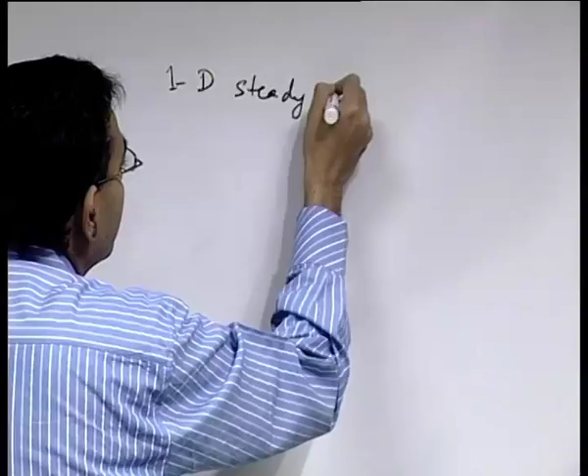In our previous lecture we were discussing finite volume discretization and we illustrated it through the example of a one dimensional steady state heat conduction equation with some heat source.

Now, in the preliminary derivation that we had made, we made certain assumptions. One is that the thermal conductivity is constant, another is that S is constant. There can be interesting non-linearities in the problem if the thermal conductivity and S are both functions of temperature, and then this equation becomes a non-linear equation whose solution may be based on an iterative strategy.

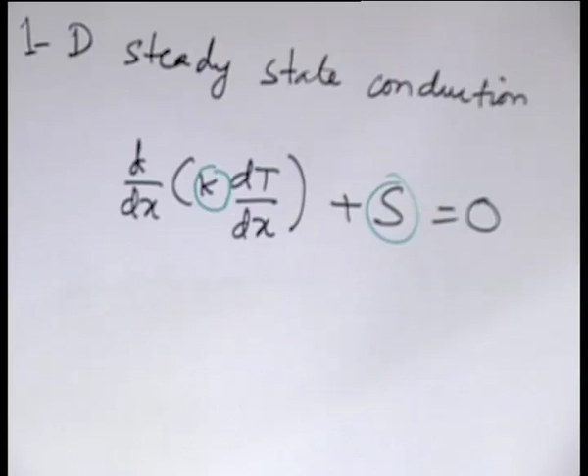So for example, one can start with an initial guess temperature and calculate all the coefficients. We will see how the coefficients may be changed or altered if, for example, S is temperature dependent. These coefficients may be calculated at the particular guess value of the temperature. Based on that, new temperatures can be solved, and this iteration may be continued till the difference between the new and old temperature at each grid point becomes very small. That is the standard iterative procedure one might follow.

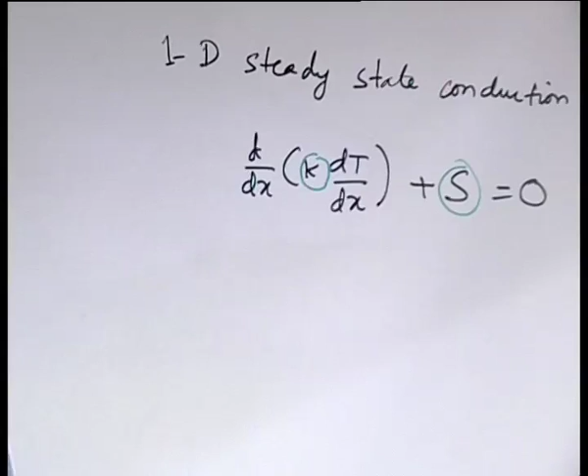So we will look into these issues one by one. The first and foremost important thing for us to consider is that S may be more complicated than what we have considered, and K may be more complicated than what we have considered. With these new considerations we will get new discretizations, but what are the basic requirements that all these discretizations should satisfy?

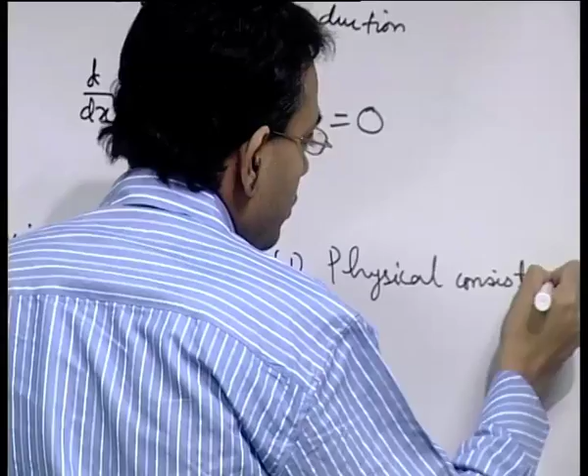So the important requirements of the discretization will be as follows: physical consistency and overall balance.

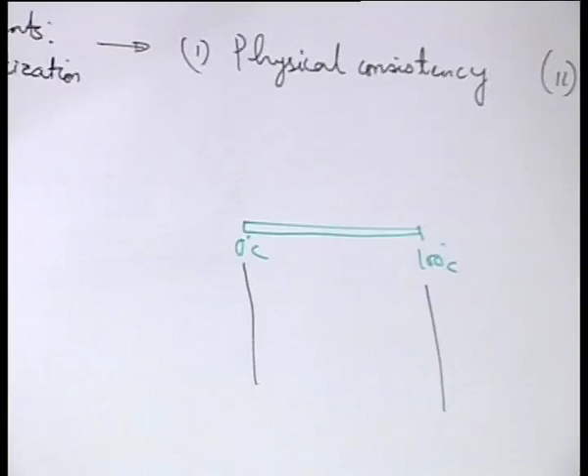Physical consistency means that the solution obtained out of the discretized equations should be physically consistent. Let us consider an example. Let us say you have a rod with the two ends at temperatures of 0 degree centigrade and 100 degree centigrade. Let us say all the properties are constant and there is no heat source or heat sink. So we know that the temperature will vary linearly between 0 and 100 degrees centigrade.

That is the exact solution. Now if you get some solution which is like this, that may be inaccurate, but it may still be considered an approximate solution.

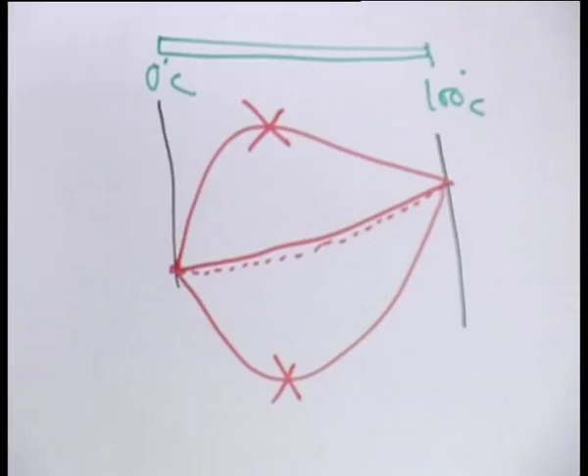But if you get a solution like this, or maybe like this, these are not physically consistent, because in these cases you are getting temperatures somewhere in the domain beyond the bounds of 0 to 100 degree centigrade, and that is physically inconsistent. So whatever approximate solution you get from the numerical simulation will still be alright physically, as long as its approximate nature does not violate physical consistency.

There are several other things to consider. For example, if you have a two-dimensional domain and let us say this boundary is insulated, if you draw constant temperature lines, or isothermal lines, say like this — these are some isothermal lines. I am not completing the isothermal lines because we have not specified the boundary conditions at the other ends, but say these are the isothermal lines close to the boundary.

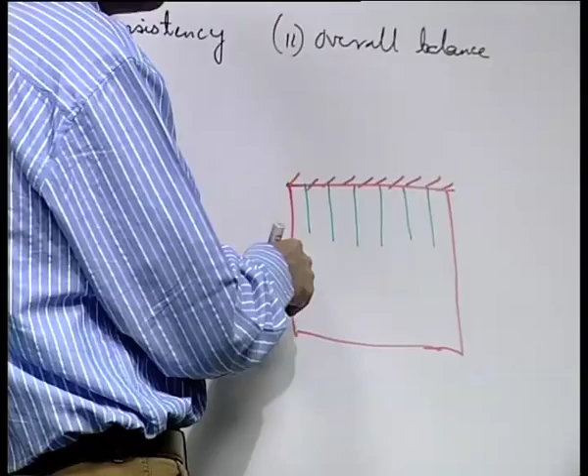This is physically consistent because the normal gradient of temperature close to the boundary should be equal to 0 if it is insulated. That means the isotherms must be perpendicular to the boundary at the boundary. But if you have these inclined somewhat like this or like this, then that is physically inconsistent, so this will not be the case.

So based on the physical description of the problem, you have to figure out first whether your solution is physically acceptable, then the question of accuracy will come.

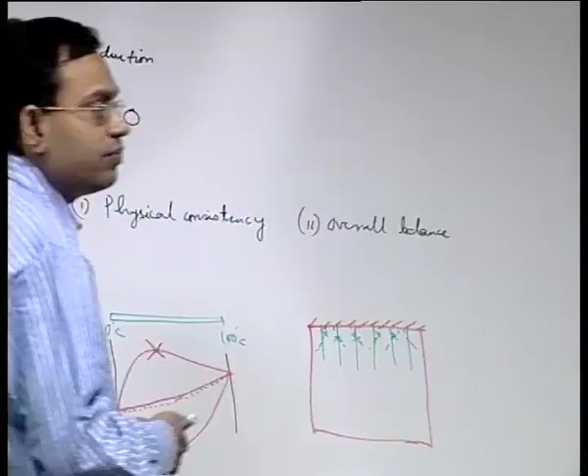Overall balance is something we have already discussed, that each of these equations represents conservation of something. So overall balance means it is possible to use these equations to represent the balance of the particular variable over the entire domain, which is a summation of many control volumes. So if you can ensure the conservation law is imposed on each control volume, then you can ensure that the conservation law is imposed over the entire domain.

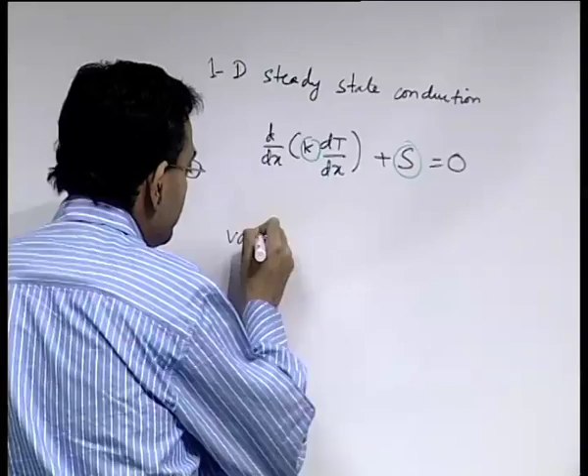So with these requirements, we will now go into the illustration of variable S. Let us say that S is some function of temperature. S can be any arbitrary function of temperature, but since we are trying to restrain ourselves within a system of linear algebraic equations, we will consider an example where S is a linear function of temperature.

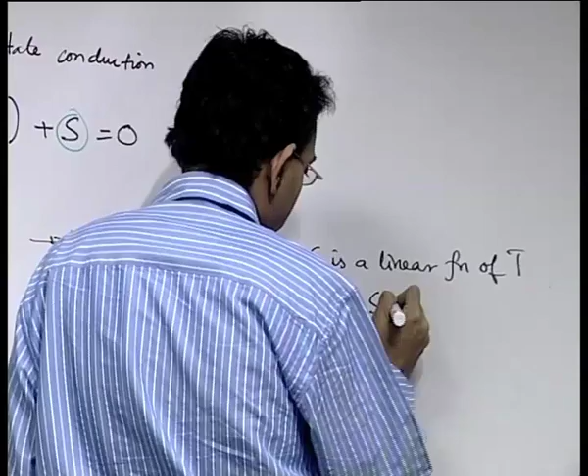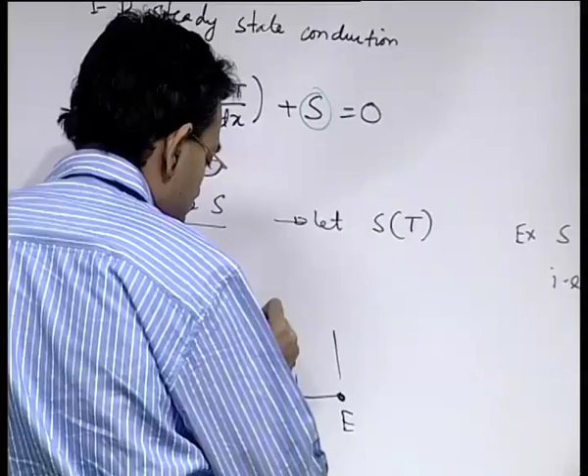So if you have a domain like this, with discretized grid points as shown, subdomain rather, we integrate the governing equation over this control volume and what we get is k dT/dx at e minus k dT/dx at w.

Now what profile assumption have we considered for these terms? Piecewise linear profile between the grid points. So that will give you...

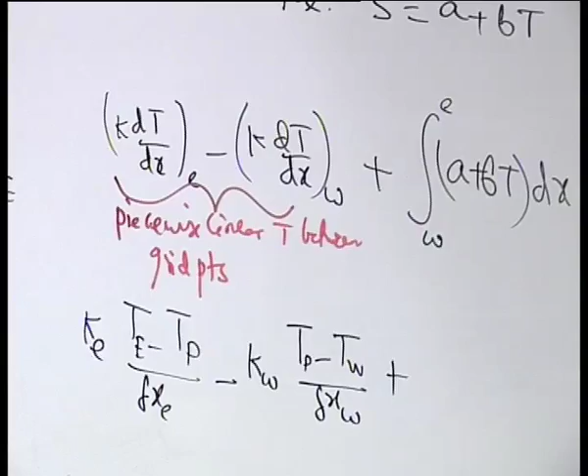Now the question of profile assumption for T in this expression. We have already discussed that the finite volume method has one flexibility. What is that flexibility? You can use different profile assumptions in different terms, because eventually the profile assumption is required only for evaluating the necessary integrals. Once the integrals are evaluated, the history of the profile assumption is no more important, unless there is something physically inconsistent.

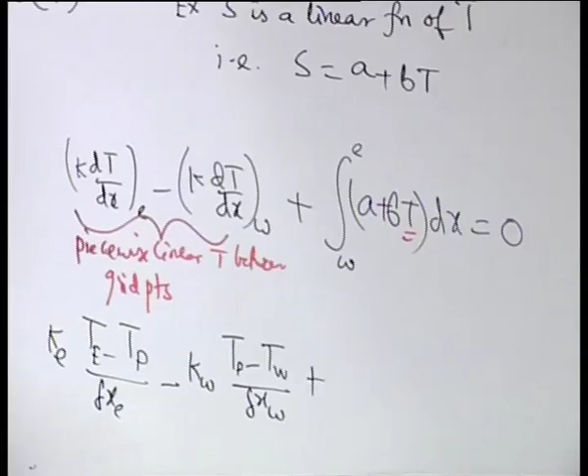So keeping that in mind, what is the simplest profile assumption for T that you can choose for this term? Constant, right. So piecewise constant temperature within each control volume. Let us illustrate it with a sketch, something like this.

So if we do that, then you can approximate this T within the control volume as T at P. So it is as good as A plus B Tp, where Tp is a constant. So A plus B Tp is a constant, it comes out of the integral, so that times delta x, that is equal to 0.

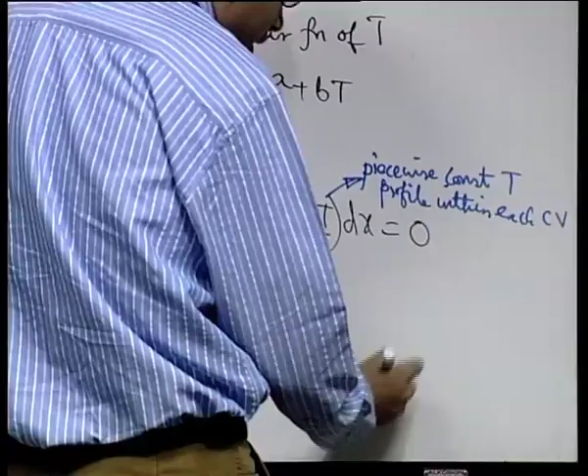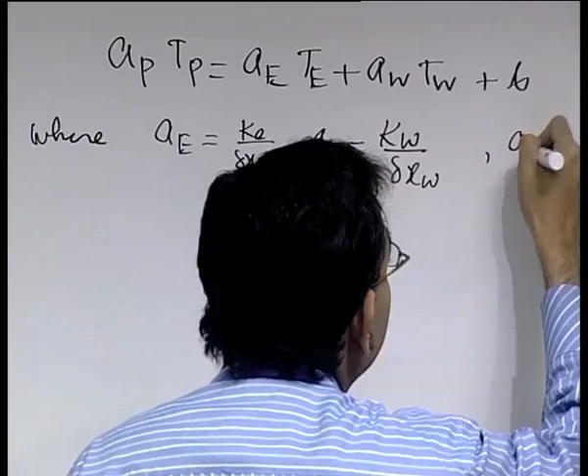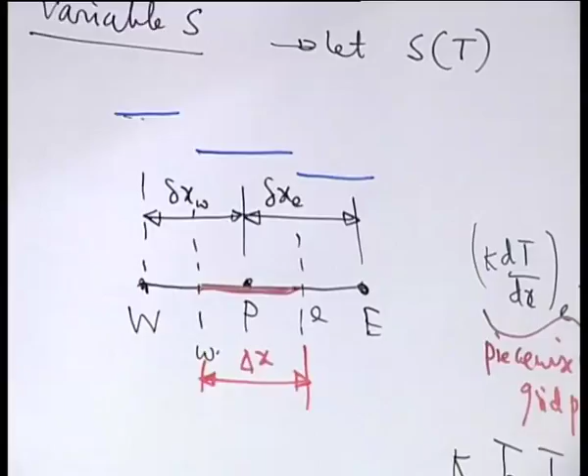If you consider a piecewise linear temperature variation, that is the same profile as we considered for the conduction terms, then also it is possible, but then you have to write this T as a linear function of x considering different parts. If the profile was not this one but something like this, then within the control volume you had to decompose it into two parts, because the equations are defined piecewise between small w to capital P, and then capital P to small e, and then divide this integration into two different segments and evaluate the necessary integral.

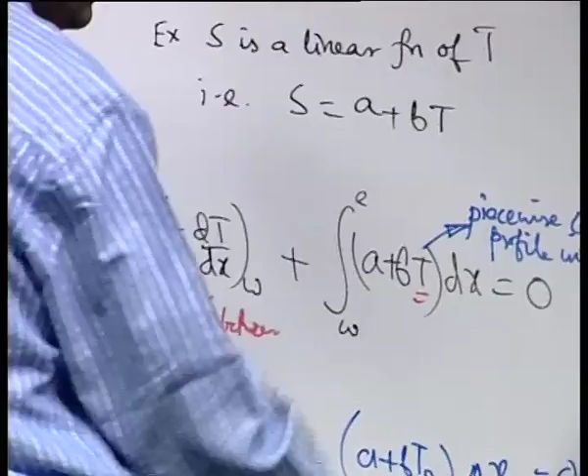So the principle remains the same, that you use the profile to evaluate the integral, depending on what profile you choose your integral will of course be different. Now next we will consider the case of the composite material with variable thermal conductivity.

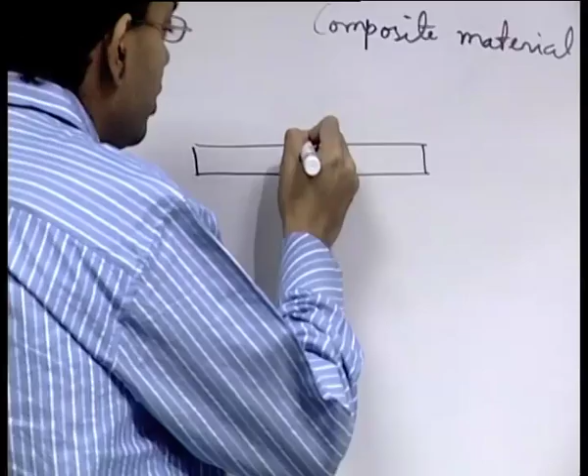With position dependent K. Let us say that the domain is a sum of two different materials. The first material has a conductivity of a particular value, say K1, and the second part has the conductivity K2. So you can divide the domain into a number of subdomains or control volumes. Let us say we divide it into 4 control volumes.

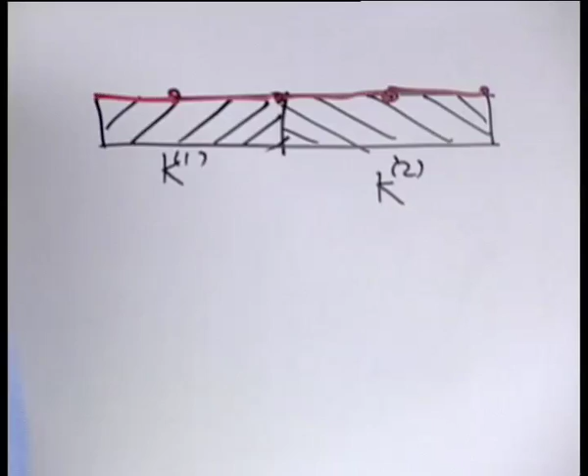And let us consider the names of the grid points as P, E, small e, like that.

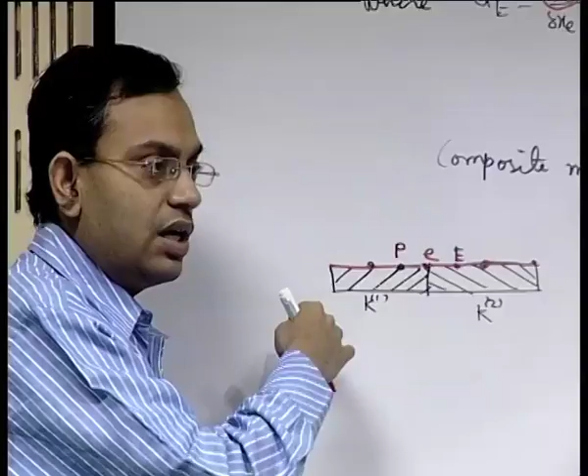So you can see where lies the ambiguity. You require to calculate the thermal conductivity at the interface small e. Now the interface belongs to what? To the left part of the domain or to the right part of the domain? It is shared by both. So there must be some equivalent thermal conductivity that should be prescribed at the interface, because the interface has its own share of the left and also of the right. If the thermal conductivity was necessary at the main grid points, then it is fine, because then it has a unique value of the thermal conductivity, but here the interface which is shared by two different materials, its thermal conductivity needs to be described properly. So how do we do that?

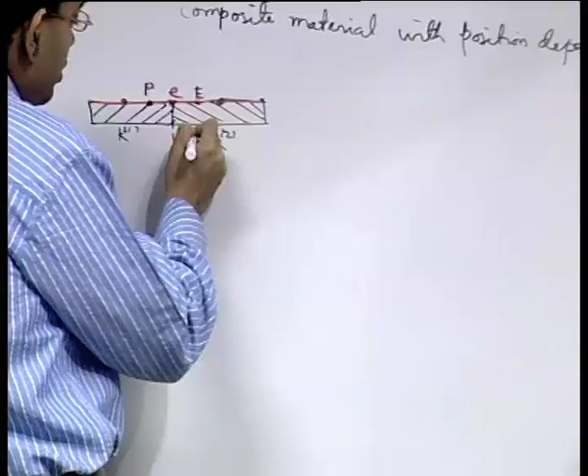Now for simplicity, let us first give some names of the dimensions and then we will consider something for simplicity in algebra. Delta x E plus and delta x E minus are the two lengths. The total length is of course delta x E. Assume that these two are the same, so that the control volume face is located midway between two adjacent grid points. This is just for algebraic simplicity, nothing more than that.

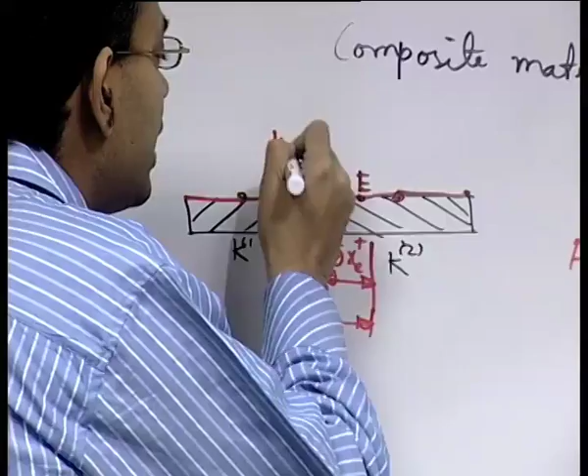So what could be an intuitive way of defining the thermal conductivity at small e if you know K at P and K at E, if small e is exactly at the midway? Average, right. So that is the most intuitive interpolation, which is a linear interpolation actually. For equal lengths this linear interpolation becomes an average. So this is an arithmetic average or arithmetic mean formulation.

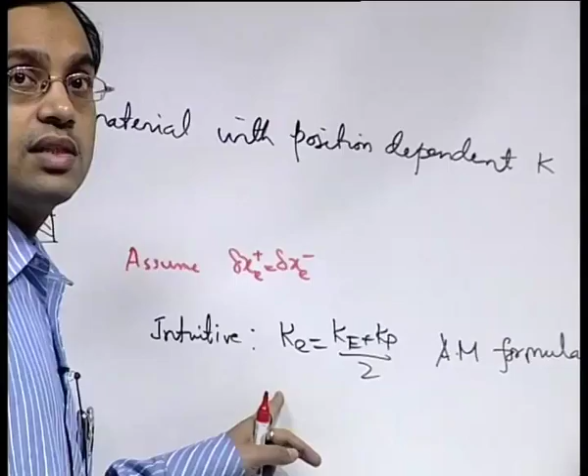Now we have to physically assess whether this formulation is acceptable, because we have just derived it from a mathematical interpolation perspective without looking into the physical issues. What could be the physical issues? Physically, you can create a domain like this.

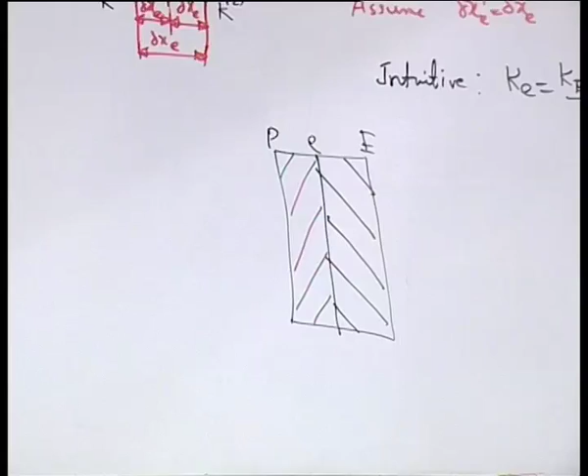As a composite slab, you have two different slab lengths with two different materials.

Let us say Q double prime is the heat flux passing through the slab. At steady state, whatever heat flux enters the left face, the same heat flux enters the middle face and leaves it, and the same heat flux leaves the domain.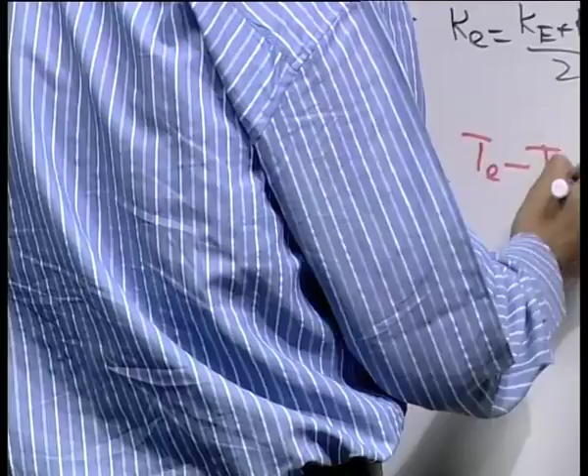So we can write this for the left material, that has to be multiplied with K of the material. We can just write it in a different way: we can write the denominator as delta x by K itself.

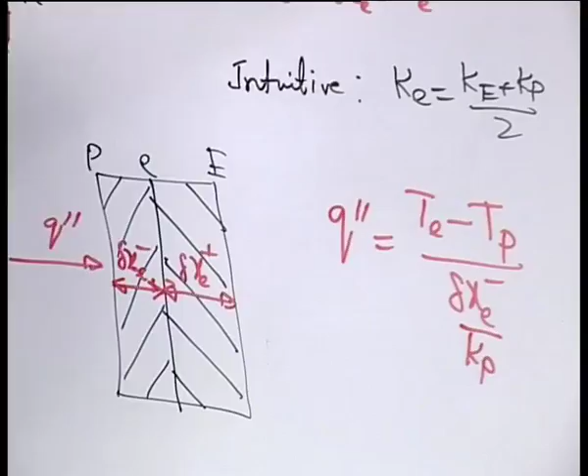That is the same as the heat flux that flows through the right material. This will be T small e minus T capital E, and this will be T p minus T e. Heat is being transferred from higher temperature to lower temperature.

So if you add these together, both the numerator and denominator, this you can write as T p minus T e by delta x e by K e, where K e is the equivalent thermal conductivity.

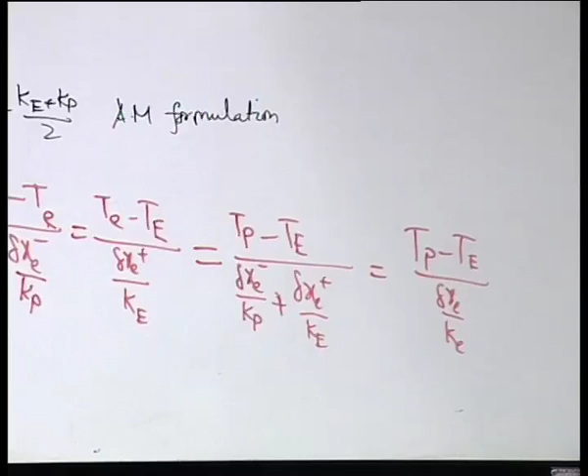That means if you replace these two slabs by a single slab, maintain the same heat flux and maintain the same temperature difference, then what would be the corresponding thermal resistance, where K e is the equivalent thermal conductivity. So from this...

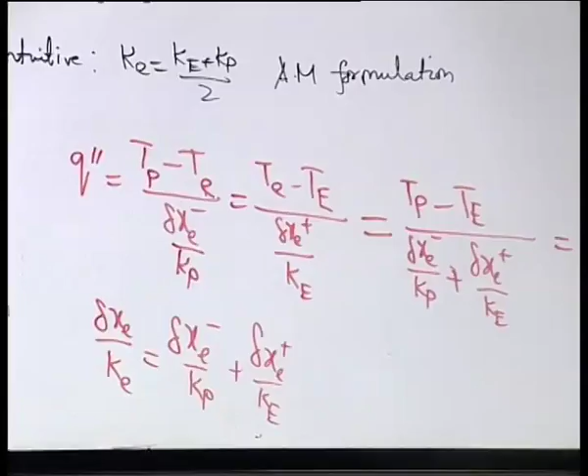And if these two are equal, that is delta x E minus equal to delta x E plus, then you have 2 by K E is equal to 1 by K P plus 1 by K E... so K E is 2 divided by that sum, which is the harmonic mean of K P and K E. This we call the harmonic mean formulation.

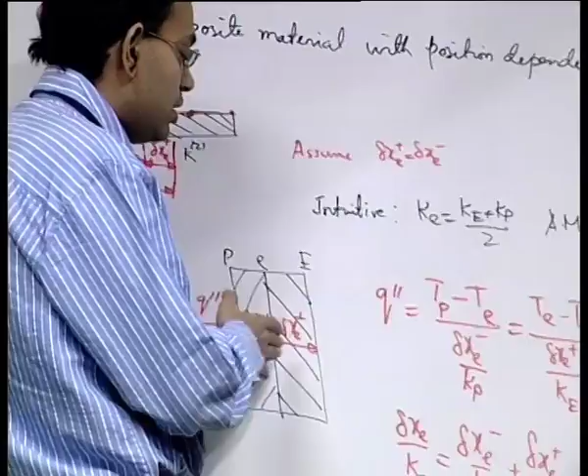Now, which formulation is physically more appealing? Of course, the harmonic mean formulation we derive from the basic physical sense of heat transport, so it has some physical meaning associated with it. Let us see what that physical meaning is. Let us consider some limiting cases.

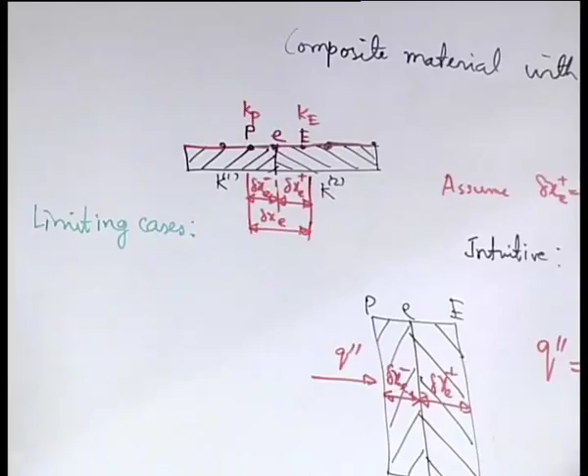One limiting case is: let us say Kp is much greater than Ke, that is the left material has much higher thermal conductivity than the right material. So the arithmetic mean formulation will give Ke approximately equal to Kp by 2, because K capital E is much smaller compared to K capital P.

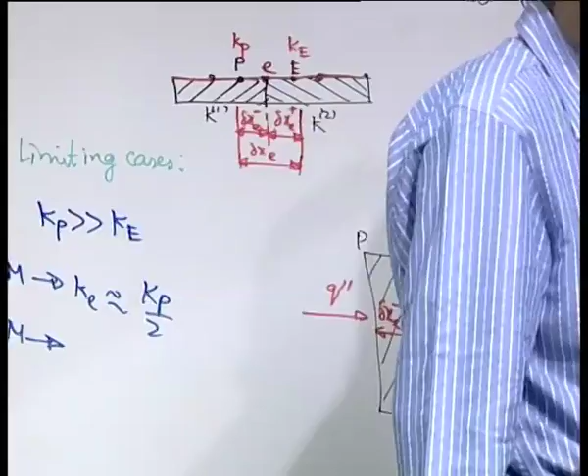Let us see what the harmonic mean formulation gives. In the denominator you have 1 by Kp and 1 by Ke. Ke is much less than Kp, so 1 by Ke is much more than 1 by Kp. So Ke will be approximately 2 Ke.

Now look at the situation. When Kp is much greater than Ke, the left part of the slab is highly conducting, and the conductivity at the interface will depend mainly on the resistance provided by the right part of the slab. But the arithmetic mean formulation doesn't reflect this. So even if Ke is 0, a highly insulating material, K at small e will still show a value dependent on Kp but not on K capital E.

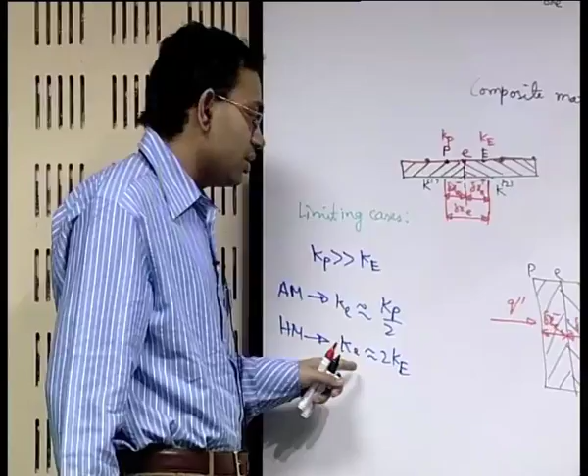Whereas if Ke is very small, tending to 0, there is no heat flux at the interface, and the harmonic mean formulation will rightly show this. So from here we can conclude that the harmonic mean formulation is physically much more appealing than the arithmetic mean formulation for interfacial conductivity variation.

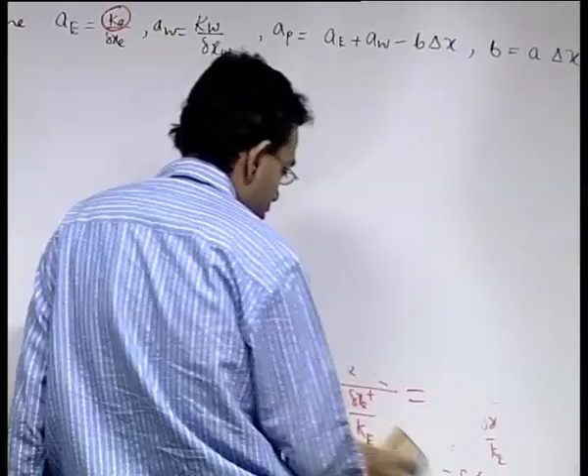Next, what we will discuss are what are called the 4 basic rules, or golden rules, for finite volume discretization of a one dimensional steady state diffusion type of problem.

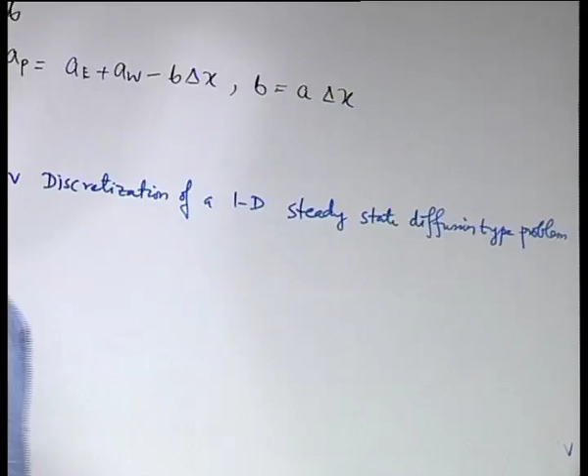What are these? Number 1: physical consistency of fluxes at control volume faces.

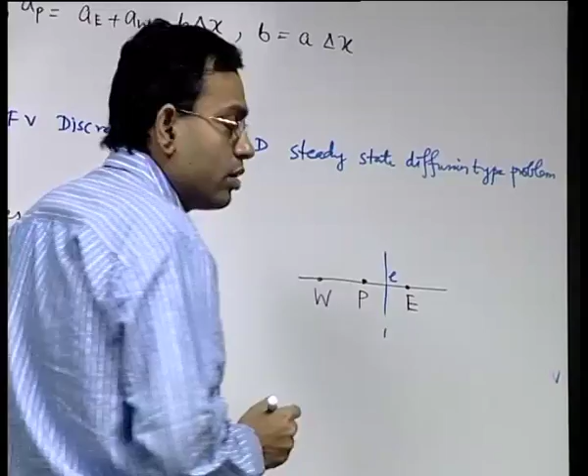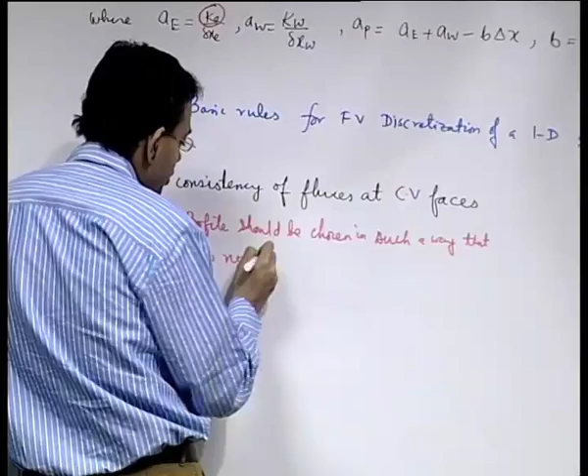This we have already discussed: if you have a control volume face, and you are calculating the flux here based on a temperature profile, then the flux calculated from one side should be the same as the flux calculated from the other side, so there is no discontinuity of flux across the control volume face. This means the profile should be chosen such that there is no discontinuity of flux at control volume faces.

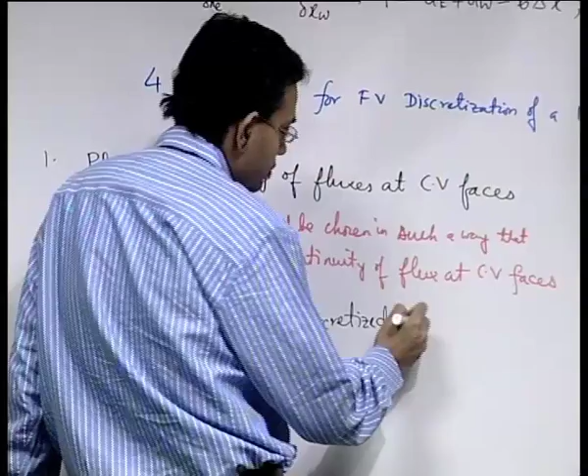Okay, then the next rule, which is perhaps the most important rule: all coefficients in the discretized equation must be of the same sign.

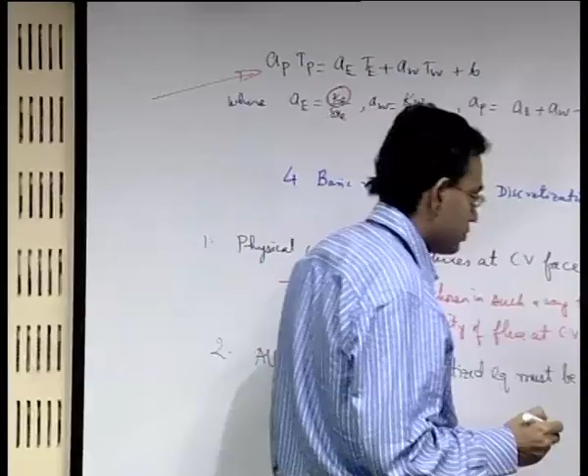Look at this example which we have already written in terms of the discretization equation coefficients. This discretization equation has how many coefficients? It has AP, AE and AW, these three coefficients. Let us consider an example where B equal to 0. Then you can see that in this example you will have AP equal to AE plus AW.

So let us consider some examples, say you have 10 Tp is equal to 15 Te minus 5 Tw. Let us say B is equal to 0, there is no source term. Let us say by some algebra somebody has come up with this discretization equation where things are in appropriate units.

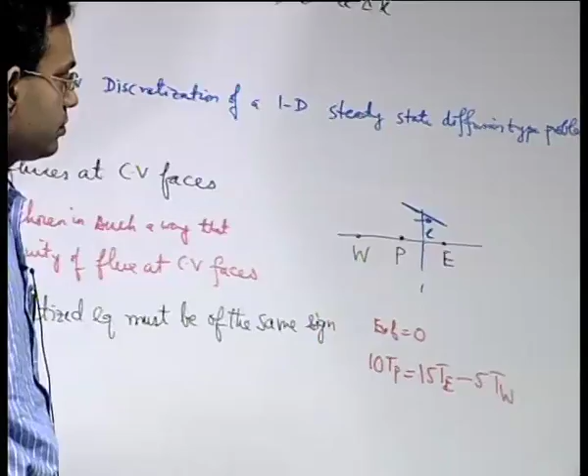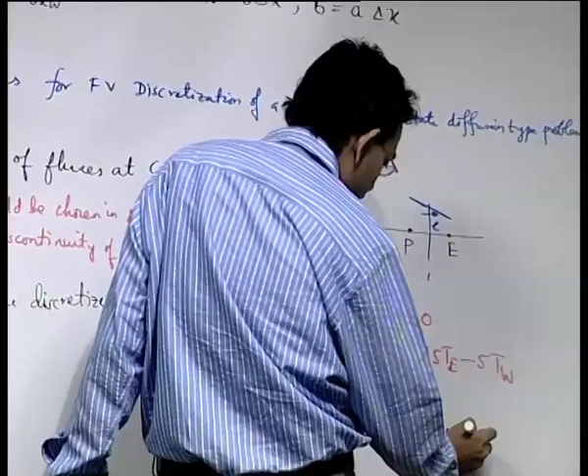Now let us see what is the consequence. Let us say that Te equal to 10 units of temperature and Tw is 100. Then what is Tp? 15 into 10 minus 5 into 100, by 10. What is this? Minus something.

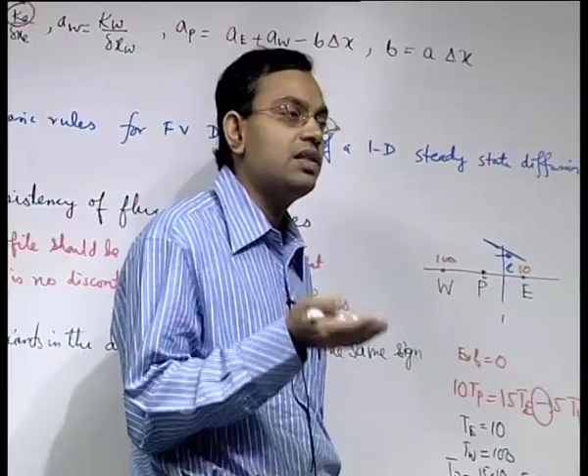So you have to look into it physically: you have the temperature at W as 100, temperature at E as 10, there is no heat source in between, that is why B is 0, and you are getting the temperature at P as something which is not bounded within this. So it is physically inconsistent. Where from did the inconsistency come? It came from this negative sign of coefficient in the discretized equation. This could have been avoided if all the coefficients are of the same sign, then increase in the temperature of the neighbors will increase the temperature of the grid point in between, and decrease in the neighbors will result in decrease of the temperature of the grid point in between.

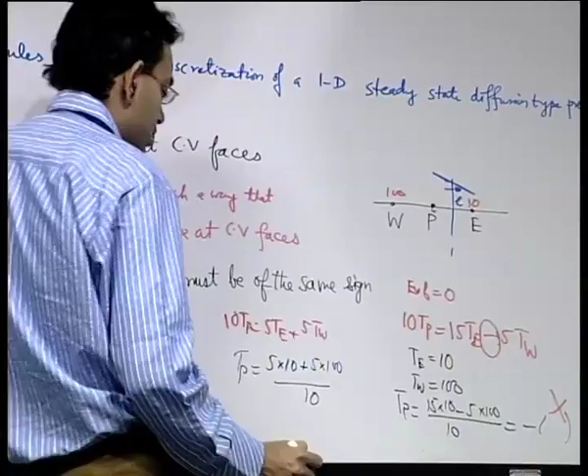So we can say that this problem could have been avoided if we had ensured that all the coefficients are of the same sign. Let us consider that as an example. If you consider 10 Tp is equal to 5 Te plus 5 Tw, then Tp is equal to 5 into 10 plus 5 into 100, by 10. What is this? 55. So this is acceptable, between 10 to 100.

So we must make sure that after discretization all coefficients in the discretization equation should be of the same sign. The same sign could be positive or negative, but the sign convention that we will choose from now onwards is that the same sign is a positive sign. So by sign convention, we will consider that sign to be positive.

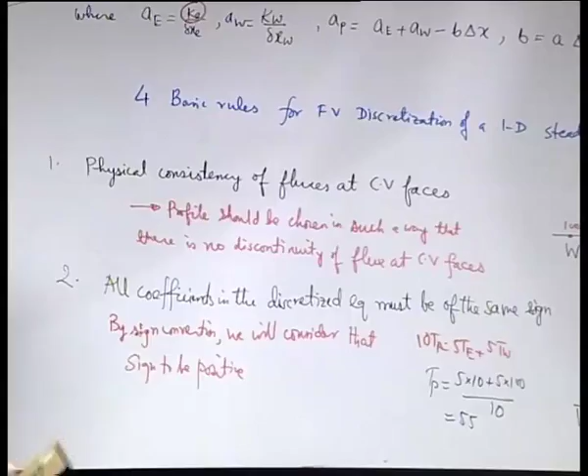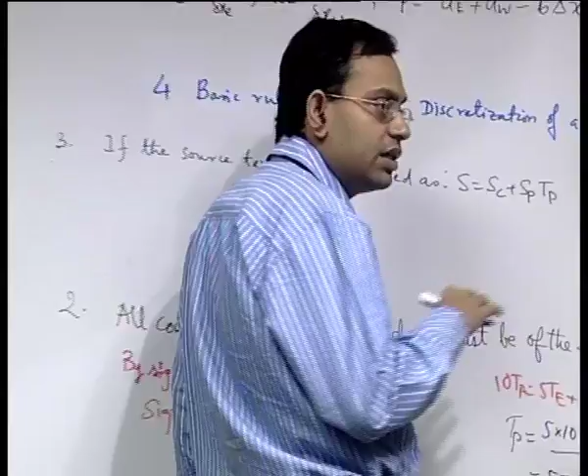If the source term is linearized as S equal to Sc plus Sp into Tp, remember we had S equal to A plus Bt as a linear form of the source term, and since we have used a constant temperature profile within each grid point, within each control volume, for representing the source term, that is why T is equal to Tp. So the form of the source term, considering the considerations we had discussed just now, is S equal to Sc plus Sp Tp. If that is the case, then Sp must be negative.

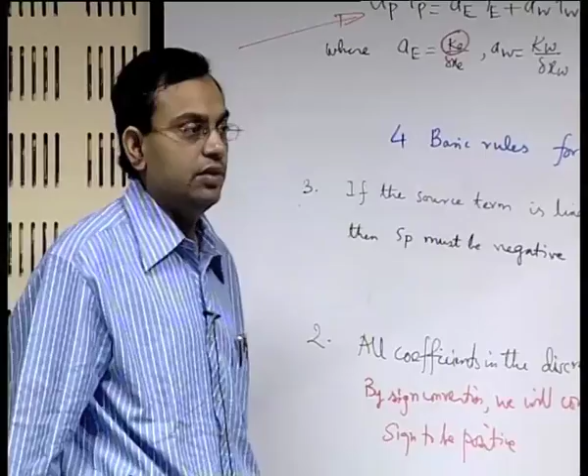In this nomenclature of Sc and Sp, this is Sp and this is Sc. You can clearly see why we would need to make Sp negative, so that we make sure that irrespective of the values of Ae, Aw and delta x, Ap is always positive. Because if we allow Sp to be positive, in some cases Ap will be positive, then we get rid of the problem, but in some cases Ap may be negative, it all depends on Ae, Aw, delta x. So we do not want to take a chance, and we make Sp itself negative, so that Ap will be positive and there is no question of having different coefficients of different signs. So consideration number 3 is an extension of consideration number 2.

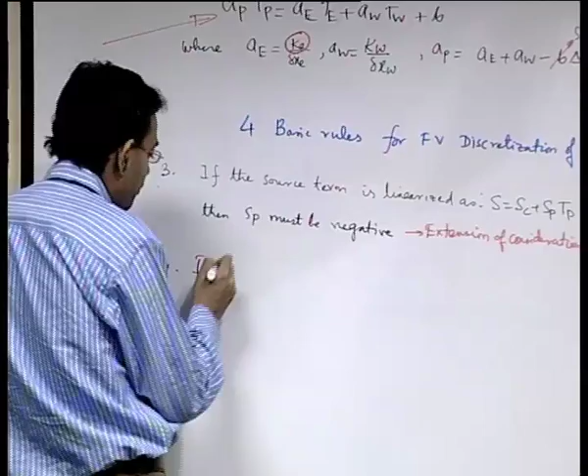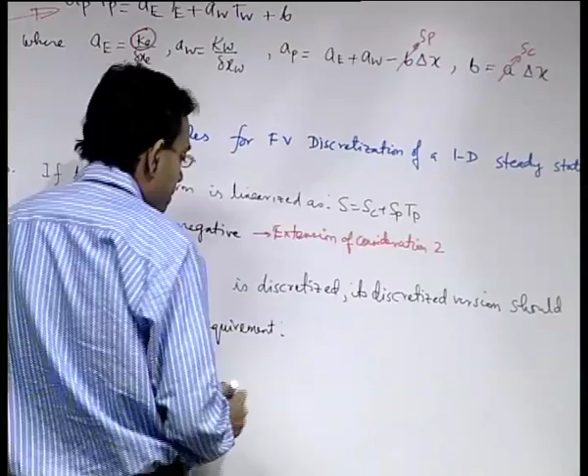Then the fourth consideration: if a linear governing differential equation is discretized, its discretized version should satisfy the following requirement: if T is a solution, then T plus C is also a solution. This is a property of a linear differential equation - if the differential equation has temperature, for example, as the dependent variable, and if T is itself a solution, then T plus C will also be a solution.

Let us see whether this is satisfied when we consider the source term is 0, so example S equal to 0. Let us replace T with T plus C and see whether the equation gets satisfied. So, we are interested to see whether this is equal, given the source term is 0, so there is no B.

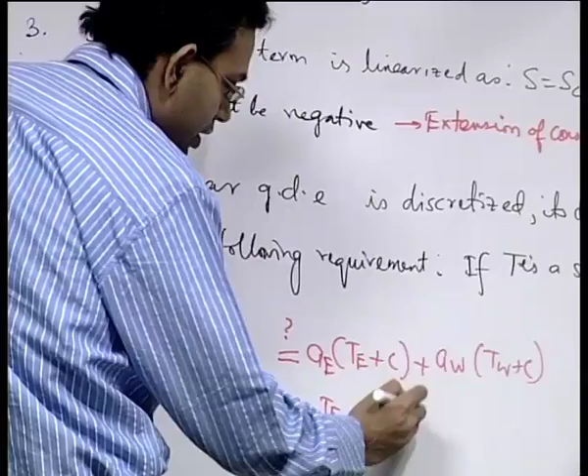We check this equality given that we have already found AP Tp is equal to AE TE plus AW TW. If you subtract this, we need to check whether AP is equal to AE plus AW. If you subtract these two, C will get cancelled. So we can see that this requirement is indeed satisfied - AP is equal to AE plus AW when there is no source term.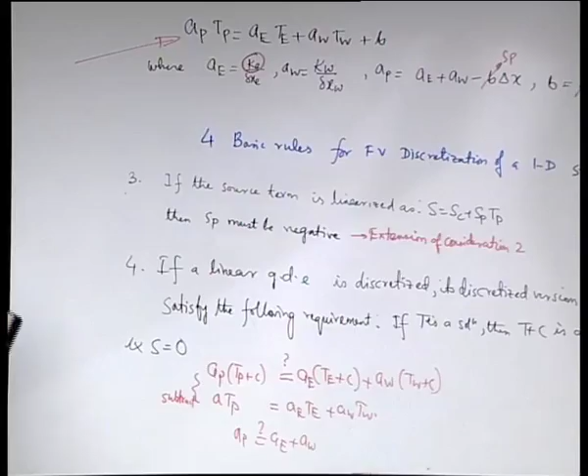So this discretization in its discrete form satisfies the linearity - that if the temperature T is a solution, then T plus a constant is also a solution. We have earlier seen that this constant is evaluated by imposing a Dirichlet boundary condition at one of the boundaries. So these basic rules are very important, and when we discretize even more complex problems, many times these discretization rules will help.

Now next we will discuss - we have till now considered a source term which is linear in form, but if the source term is non-linear, how can we treat it? Since we are preparing a linear algebraic framework of the system of equations we intend to solve, we will keep the source term in a linear form, although the actual source term may be non-linear. So there is a method of conversion of a non-linear source term into a linear form, and that is called source term linearization. We will next see source term linearization.

The best way to learn it is through some examples. Let us say the source term is equal to 3 plus 4T. If we want to linearize it, our objective will be to say what is SC and what is SP, considering S is equal to SC plus SP times TP.

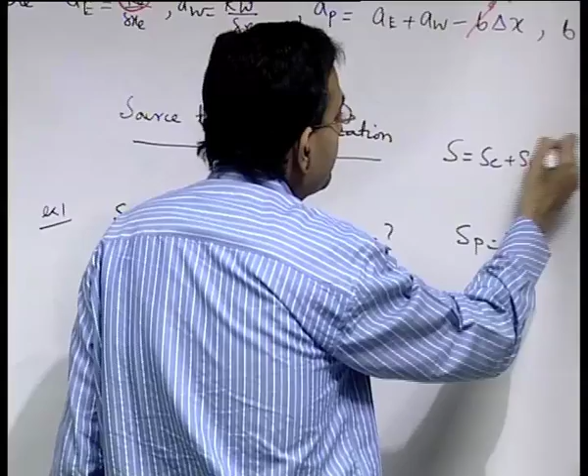From the form it might appear that we could take SC equal to 3 and SP equal to 4. Can we do that? We have just seen that SP has to be negative, but here SP is positive. So this will not work.

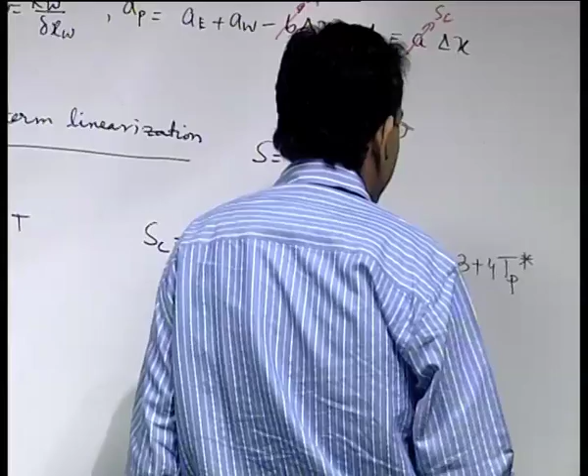So what we can do in an iterative framework is start with a guess for temperature as T star, and dump the full value of the source term into SC. Remember this is a guess value, so it is a known value - it is no more a variable. So we are dumping everything into SC and making SP equal to 0.

Sometimes if you want to control convergence, you can put some effect on SP and some effect on SC. For example, you can have SC as 3 plus 6 Tp star and SP as minus 2. There could be many such choices possible, and with this you can sometimes slow down the convergence a bit. If the iteration has a tendency to diverge, controlling the convergence may be necessary and such considerations may be taken. This comes from experience - what kind of SC and SP you can use - but obviously there are certain kinds which you cannot use.

Let us consider a second example: say 3 minus 4T. Here you can easily take SC is equal to 3 and SP is equal to minus 4, and this is the best choice, no doubt about it.

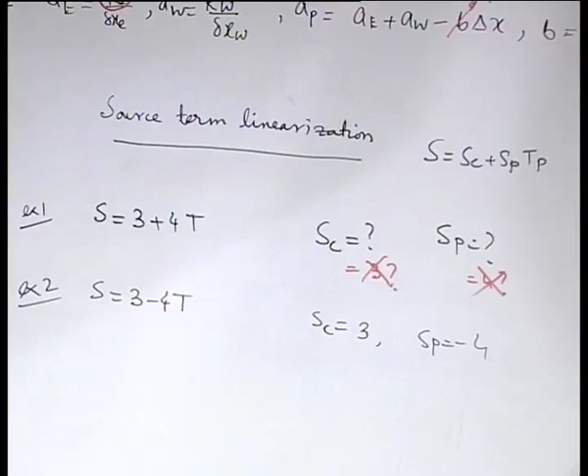If you want to slow down the convergence, you could take, for example, SC equal to 3 plus 4 Tp star, SP equal to minus 8, like that. So you can see there is no unique choice, but there are certain choices which are not acceptable for certain cases - that we have to remember.

But till now we have considered forms where S is given as a linear function of temperature. What happens if it is a non-linear function of temperature? Let us say 3 minus 4 T cube.

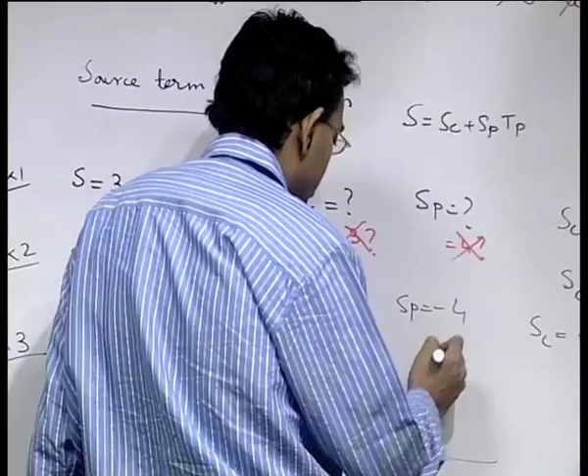Forget about S equal to 3 minus 4 T cube for a moment, let us say that you have some arbitrary S as a function of T. This is a nonlinear source term, and we have to go through iterations as discussed earlier. Let us say that during some iteration you have the value of Tp as Tp star.

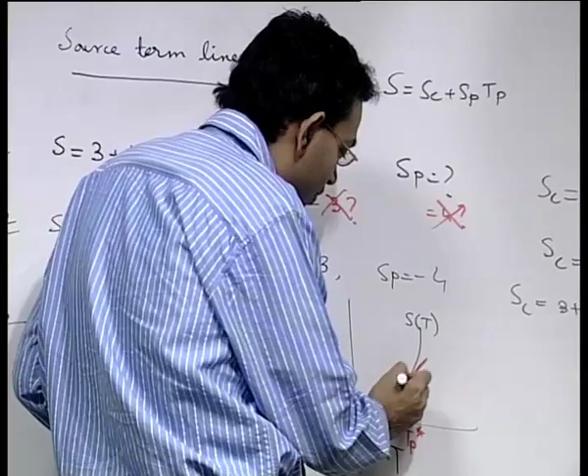So you want to represent this nonlinear function as a linear function. What can be the best linear function? It can be a tangent to the curve at that particular point, because a nonlinear function has many higher order derivatives. If you replace it by a straight line, you sacrifice the higher order derivatives, but at least the first order derivative you can represent correctly, since the tangent has the same first order derivative as the corresponding slope of the actual nonlinear curve. That is why you can replace it by a tangent.

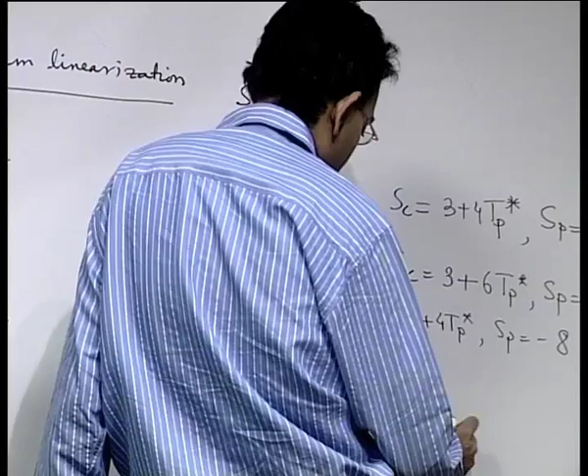Now, if you replace it by a tangent, what is the equation of this tangent? Let us write this. Let us say that the corresponding value is S star. So we can write S minus S star, analogous to y minus y1 equals m into x minus x1, where x is like t and y is like s.

Let us illustrate this principle through the example S equal to 3 minus 4 t cube. So S star is 3 minus 4 Tp star cube. What is ds/dt? It is minus 12 t square. So ds/dt at Tp star is equal to minus 12 Tp star square. So S minus S star, that is S minus 3 minus 4 Tp star cube, is equal to minus 12 Tp star square into T minus Tp star.

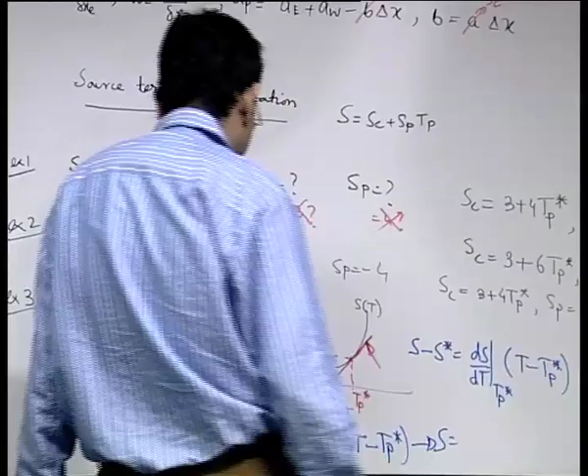Let us expand it and write S equal to... what is the constant term? On that side you will have 3, then minus 4 Tp star cube plus 12 Tp star cube. So 3 plus, sorry, 8 Tp star cube, right, there was 4 and 12, minus 12 Tp star square into T. So what is SC? SC is 3 plus 8 Tp star cube, and SP is minus 12 Tp star square.

So you can see that SP is negative always because Tp star square is positive. So this will work. But let us consider a fourth example.

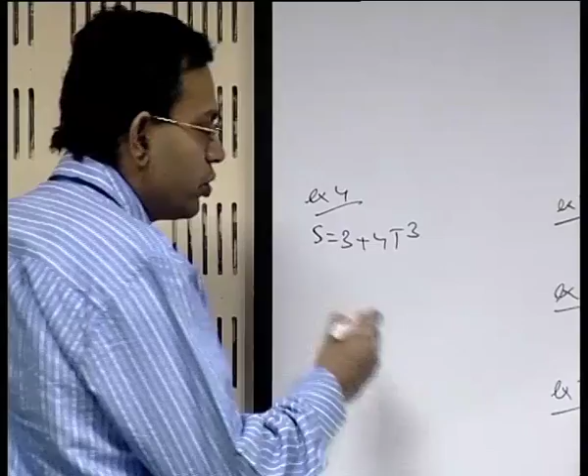Say S is equal to 3 plus 4 T cube. Then if you want to do the same linearization, S star is 3 plus 4 Tp star cube, and ds/dt at Tp star, just replacing the minus sign of the previous example with the plus sign. So you have S minus 3 plus 4 Tp star cube is equal to 12 Tp star square into T minus Tp star.

So what we get out of it: S is equal to 3, then here you have minus 12 Tp star cube and on the other side will come plus 4 Tp star cube, so minus 8 Tp star cube plus 12 Tp star square T. So this will be SC and this will be SP.

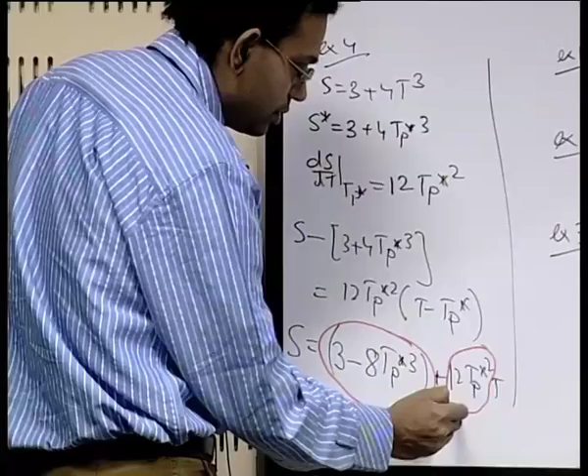SC may be negative, positive, whatever, we do not have any restriction on the sign of SC, but we concentrate on SP, and we see that here SP is positive. So this will not work. The important thing is mathematically source term linearization we can always do, but that linear form of the source term may work or may not work.

So when the linear form does not work, what do we have to do? We can do several things. As an alternative, we can dump the entire term into SC and set SP equal to 0, or we can dump something into SC with some negative on SP, whatever, but we cannot do this particular linearization, since it is mathematically correct but will give physically inconsistent solutions.

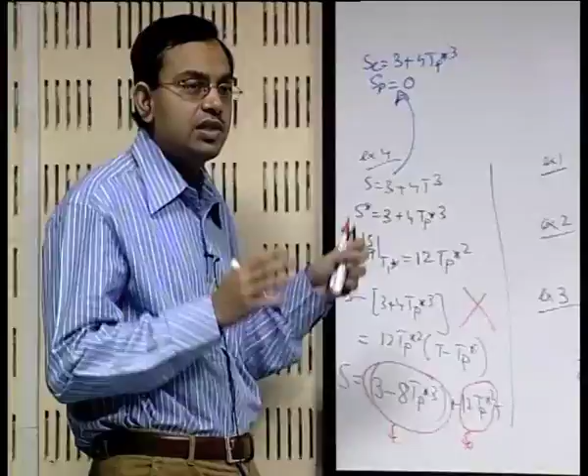So this is what we have to remember all the time, we keep stressing upon it, that discretization is a mathematical procedure, no doubt about it, but the mathematics carries an important physics within it, and the discretization must not violate the essential physics that should come out of the discretization method. Okay, so we stop here today.

In the next lecture, we have now visited all the discretization intricacies, but we have not yet visited how to implement boundary conditions in the finite volume method. So that we will do, and then we will consider one or two illustrative examples, and then we will move on to one dimensional unsteady state problems. Thank you.